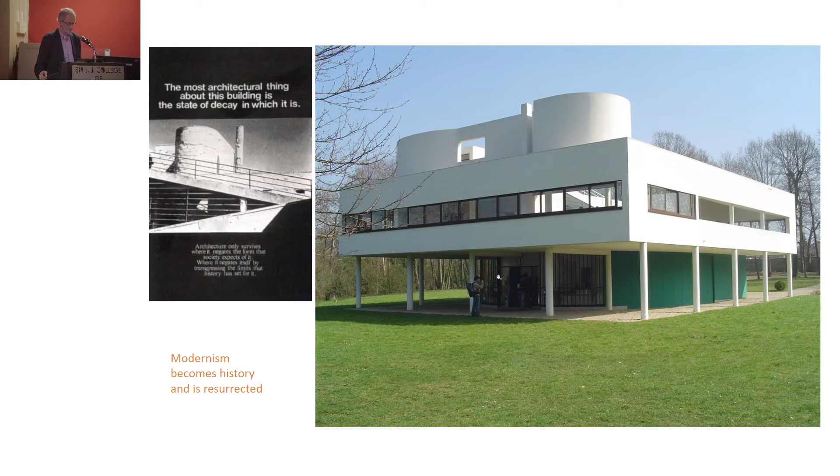Now, shortly thereafter, in the early 1960s, the French Ministry of Culture decided that Le Corbusier's Unité d'Habitation, which at that time was only 12 years old, should be a listed structure. And that thus began the process of actually listing modern architecture. Pay note to the fact that it was only 12 years old, because typically, as you've probably encountered in the charters and standards by which conservation architects and planners work, you usually wait for about a 50-year period to achieve that level of significance, to make sure it's really something that is legitimately going to be historic.

Modern architecture changes all this because of the wear and tear that happens on these buildings, and the fact that many of them simply were not durable. And you had to make the choice early on if you wanted to save it.

So let's make sure we understand basically what we're talking about. We have a kind of common lexicon of what this modernism and modernity is. It's about three broad categories: society, technology, and aesthetics.

And I'm going to show you three examples of buildings that I'm quite familiar with that illustrate these, I think, but also illustrate preservation or conservation lessons at the same time.

First of all, this is the Kiefhoek Housing Estate by J.J.P. Oud in Rotterdam. And of course, housing was one of the key drivers of the early modern movement. Housing and health — it was all about uplifting the condition of the European proletariat. This is really what began, and really the global proletariat, because it very quickly became a larger movement than just in Europe.

This is the kind of housing that was built, circa 1930. But bearing in mind what I just said about durability, these buildings by the 1990s were literally falling apart. They were made of a substandard concrete masonry unit which was crumbling, and they had basically become condemned by the Dutch government as being uninhabitable.

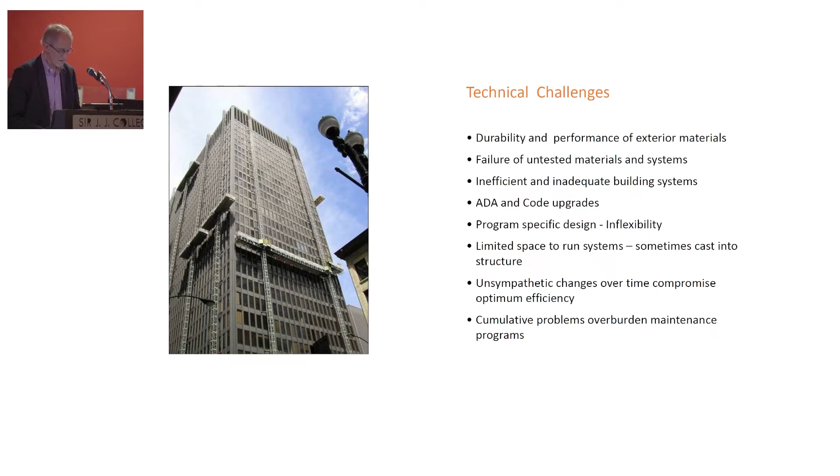I did say global, so I want to start talking about some South Asian and Latin American examples of the kinds of things being addressed now in the renewal of modern heritage.

It's going to be years not only working on the renewal, but accommodating the change and the great influx of people. Years ago, we were already being shown images of these sort of ad hoc developments that happened throughout the city.

And I think the idea is not to clear that out and make it look like it was when Le Corbusier first designed it. The idea is to say, how do we integrate this stuff into the city while leaving the monumental city to the expression that it deserves?

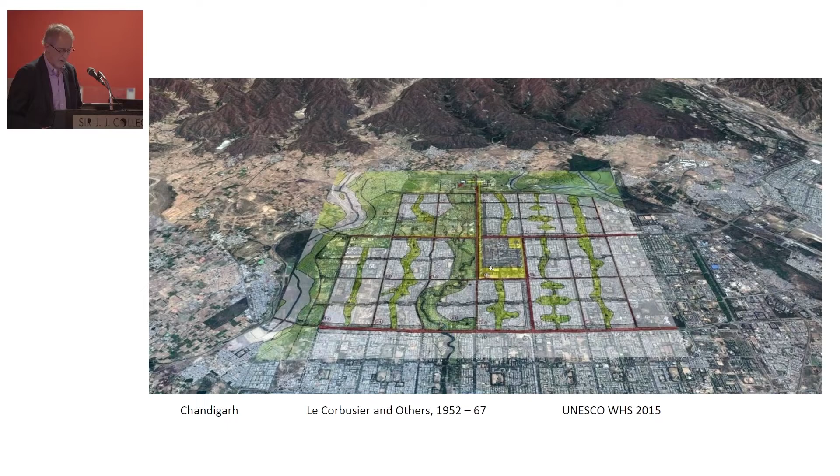George Nakashima, a Japanese architect who eventually repatriated to America, along with Francois Sammer and Chandrulal Shah.

You have, for instance, the Ministry of Education in Rio de Janeiro, the first executed modernist high-rise structure.

Those same louvers are found throughout the administrative buildings in Brasilia, and they keep these buildings well enough shaded and sufficiently habitable that they can be used throughout the year without air conditioning, although most of them are being retrofitted with air conditioning anyway.

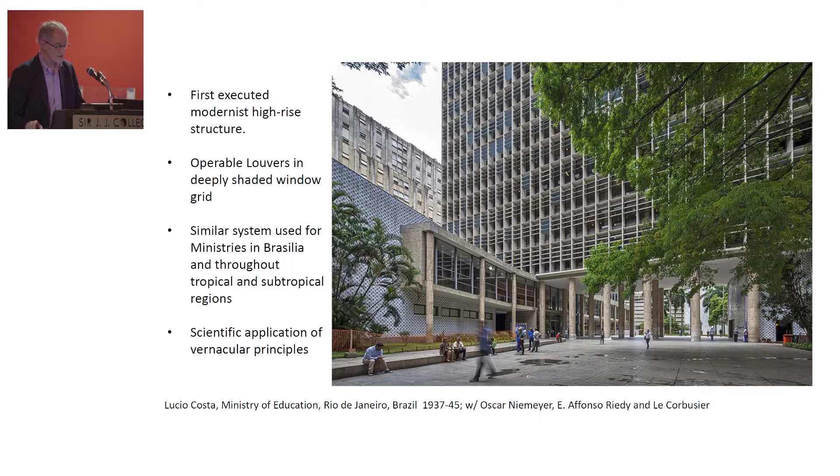There's a lot of serious heritage in Brazil. A World Heritage Site was recently inscribed for the Pampulha Ensemble in Belo Horizonte by Oscar Niemeyer. Niemeyer was a very young architect at this point in 1940, and did an interesting series of about half a dozen buildings around the lake, which has been brought together and given this World Heritage designation.

It's an eclectic ensemble, and I don't know exactly how to put it from a use standpoint, but they include a residence, a yacht club, a casino, and a church. They're all very, very interesting buildings.

On a larger scale, Brasilia, like Chandigarh, was a capital city, although in this case the capital of the whole country of Brazil rather than just a province.

Those buildings I was just mentioning, if you can see my cursor, are the ministry buildings. There are six on each side, and they all use that same system of operable louvers. This is also a World Heritage Site, and World Heritage inscription means you have to play by certain rules in terms of what you do to renovate your buildings, because what they're primarily concerned about is keeping what's important about these sites important and really not changing them. So change has to be extremely carefully managed if you want to stay on that level.

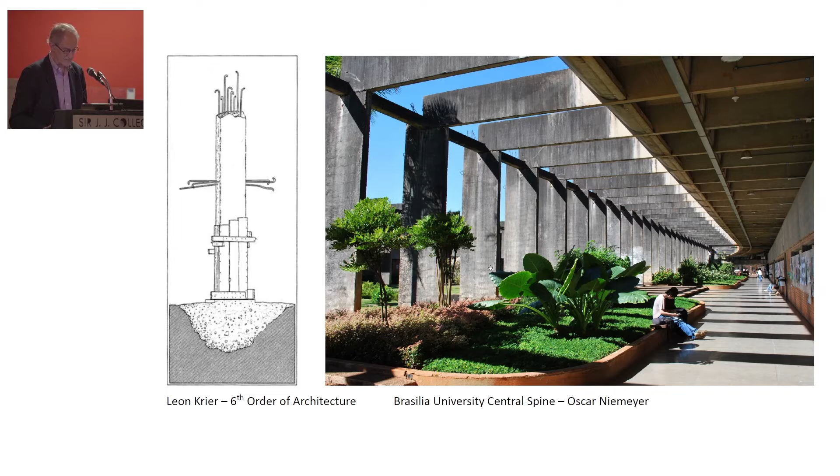I once gave a series of lectures in this building, which is the School of Architecture in Brasilia. It's part of what's called the Minhocao, the Great Worm. What fascinated me about this building was the way these concrete beams kind of end in nowhere — you can see rebar coming out of the top of the column, like Leon Krier's sixth order of architecture there. It's in a semi-ruinous state and is being overgrown with vines and that sort of thing, but it's very poetic.

In a similar way to what Balkrishna Doshi did here at the Indian Institute of Management in Bangalore, although this, in fact, was finished and doesn't have the raw concrete rods sticking up. But there is also this kind of inside-outside quality and a very poetic relationship with nature that I appreciate very much here. Doshi, of course, needs no introduction to you.

He worked with Le Corbusier on this building, the museum at Chandigarh, and he was a collaborator early on there in the 50s before going off on his own in the later 1950s. He, of course, did the School of Architecture in Ahmedabad. This building here, I think we can say, owes something to the museum he had done with Le Corbusier, but very much in his own way and his own hand.

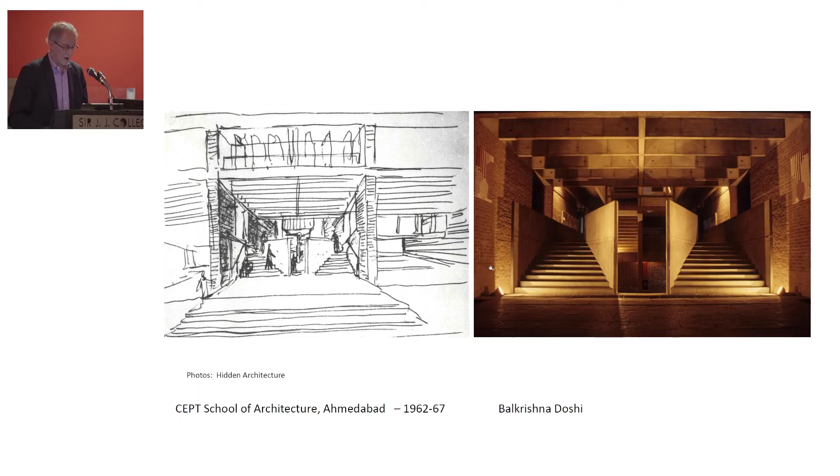These are all buildings that have been recognized in one way or another by organizations that monitor the quality and progress of these buildings. This is, again, from CEPT, a drawing of Doshi's and the actual realized stair there on the right. I also want to mention an early work of Charles Correa, here, the Gandhi Smarak Sangrahalaya in Ahmedabad.

This is a building that I think it's pretty clear Mr. Correa was familiar with Louis Kahn's Trenton Bathhouse, which also is a series of pyramidal roof pavilions. One of the things that's interesting to look at here is that it's a very simple building like Kahn's Bathhouse. Both of them don't have glass windows, they just have openings.

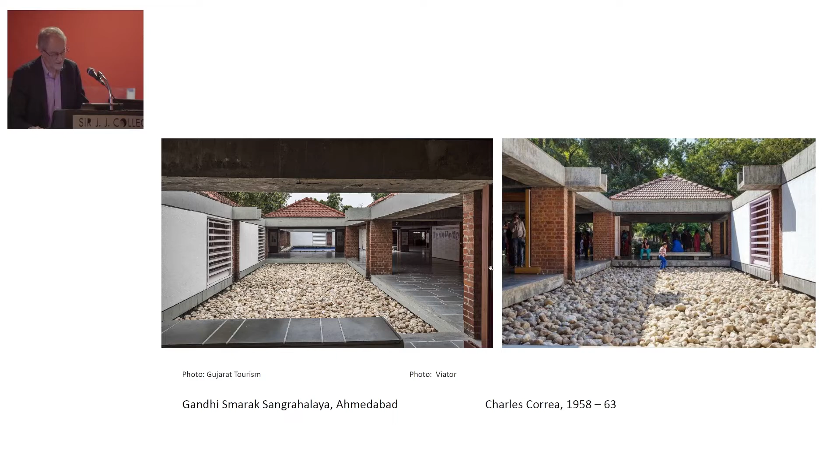If you look carefully, the image on the left, which was taken after the image on the right, you can see that the concrete surround, the supporting concrete for the roofs, is painted, whereas on the right it is still left in its natural state. There's a tremendous difference in concrete — once you paint it, there's a level of depth and variation and kind of life, if you like, to the material that disappears. You may choose to paint it in certain areas as accents, but more often than not, it takes away from the quality of what the concrete can mean for the structure.

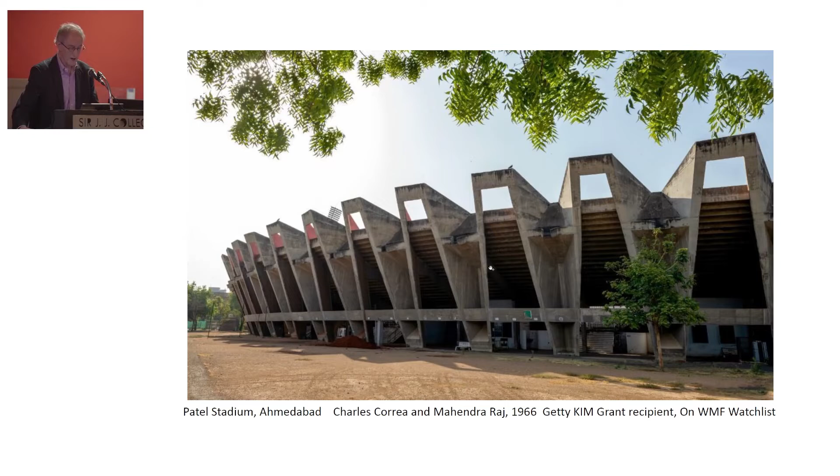So it's something to be cognizant of. Charles Correa's stadium in Ahmedabad is the subject of a Getty Conservation Institute Keeping It Modern grant and is on the World Monuments Fund's watch list.

And it should be, because concrete is the most ubiquitous substance on the planet after water. There is more concrete than there is of anything else on the planet except water. Unfortunately, it's not the most environmentally friendly material to produce, but there's a lot of work being done now to find ways to use less energy and less carbon to make something that is otherwise extremely useful.

Now, I've mentioned a couple of times the Getty Conservation Institute. Since 2012 or 13, when the colloquium was held, they've been developing this Conserving Modern Architecture initiative, which I've been involved in at different times since the beginning—I'm doing some lectures for them now. One of the things they do is give out these Keeping It Modern grants, which the Stadium in Ahmedabad received, and another building, the Gandhi Bhavan by Le Corbusier's cousin Pierre Jeanneret, was also a recipient of a KIM grant.

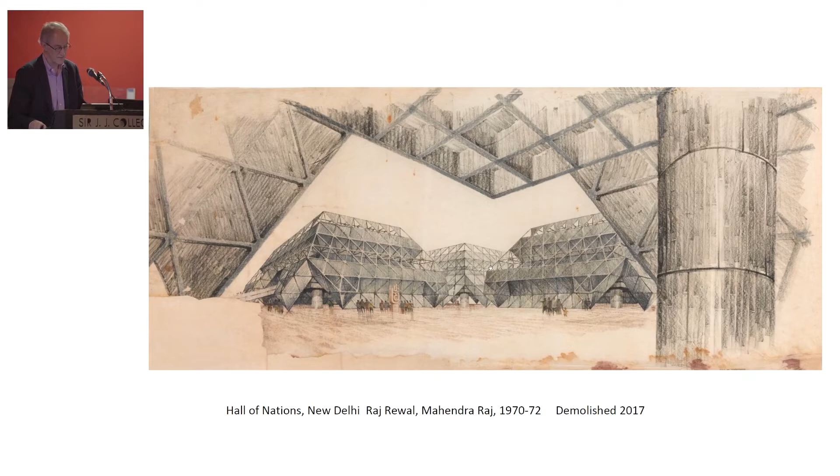This is about change in perception, obsolescence, wanting something new and latest and greatest. I don't really know all the reasons why this was taken down, but in terms of the loss of a unique artifact of modern heritage in South Asia, it's significant. It's sort of too bad.

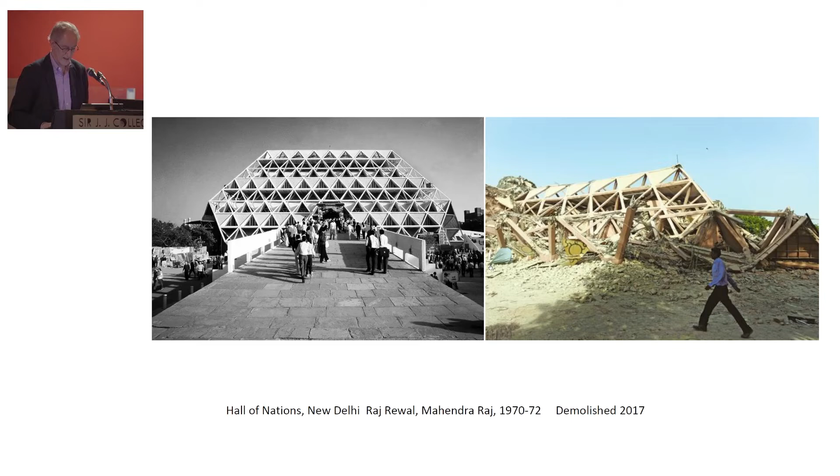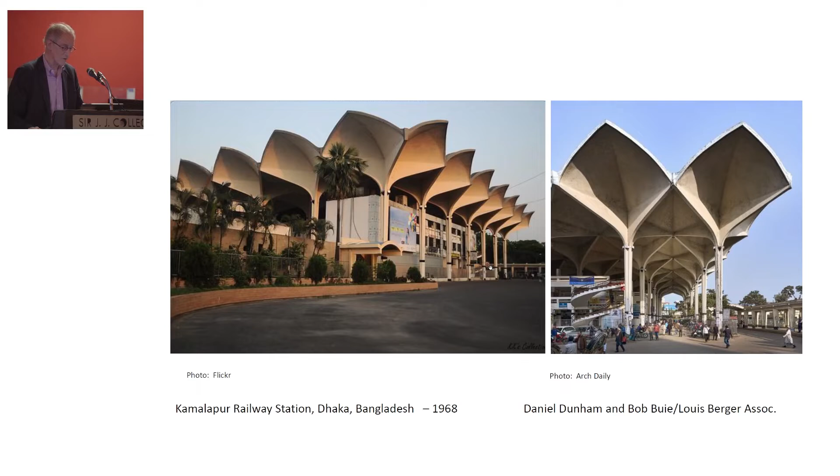Now, a better ending, at least provisionally, exists for this: the Kamalapur railway station in Dhaka, Bangladesh, designed by an American engineering firm named Louis Berger Associates. Daniel Dunham and Bob Buie were the particular engineers who designed these wonderful, blown-up concrete versions of a Muqarnas vault, which is of course a traditional Islamic architectural motif, blown up to a huge, gargantuan scale, making for a very powerful expression and again showcasing the kinds of very innovative things you can do with reinforced concrete.

I'm going to mention very briefly the Indian Institute of Management, because you really can't talk about South Asian architecture today without mentioning it. But I also understand this is an extremely complex issue, that work has been done on the complex over the years, and I'm not passing judgment, let's say that.

So to round out this portion, what we're looking for with all of these buildings is not just what they are and what they represent, but look for opportunities to tell a story about the architecture, about the institute, whatever it is that resonates with the building's users and with the admirers from afar who want to see these buildings preserved. You honor, you interpret, and you interpolate so that you can devise a platform on which to develop this. And then you be bold and informed.

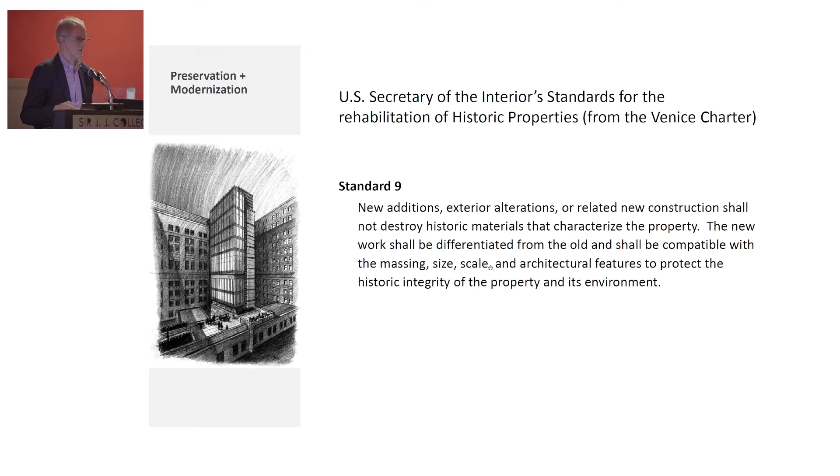When you go to intervene in a modern building, standard preservation or conservation practices require that you differentiate. That's what this Standard 9 is about, from the US Secretary of the Interior Standards, which is basically a United States rewriting of the Venice Charter. It's most of the same kinds of things, but a little broader and more inclusive.

Here's an example of a project I worked on. This is not a modern building, but you can tell what's original and what's new. There are the old wings on the side, the very new piece in the center, and these extended windows punched into the lower level of the side, which are clearly contemporary when you walk up to them, but from a distance blend back. So we tried to strike a balance between these three.

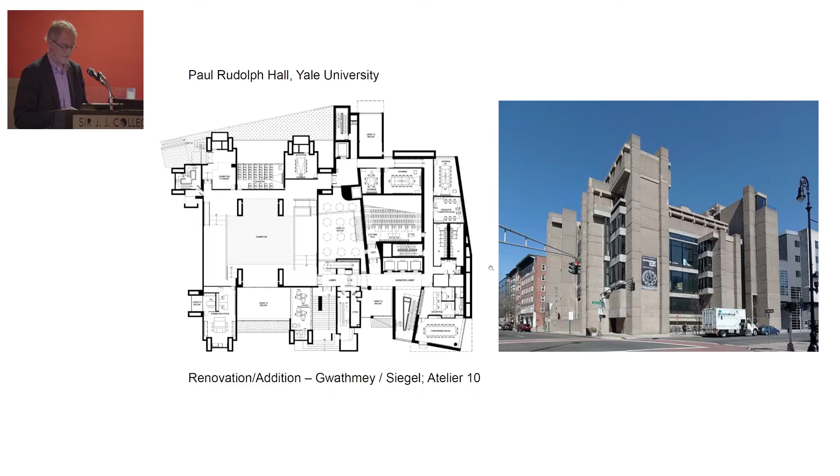In order to bring this building up to code and make it fully functional, because you have all these different levels, you have to connect them with ramps or an elevator, at least in the States. So they built an addition onto the building, which, although it has a few classrooms, its primary goal is to make the older building functional, to make all those connections across, give some relief, and provide things like washrooms. But it's a very difficult thing from the point of view of architectural language.

I think if you look at this, you might agree with me. You can see the original concrete building on the left, and on the right, this slightly tortured addition, which was the product of many great architectural minds, maybe too many. But suffice to say, it works. It holds together.

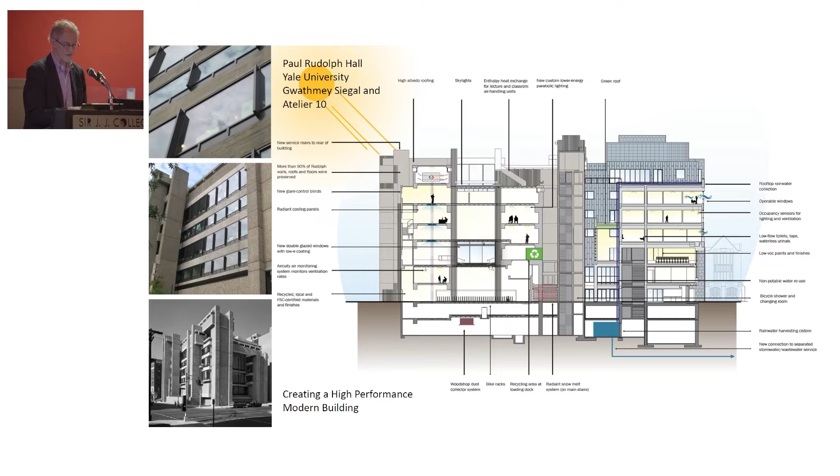What they did here, in addition to restoring Rudolph's work beautifully and solving all the internal problems, was make it a highly sustainable renovation. They worked with a firm called Atelier 10, who work around the world with architects and engineers developing aggressive sustainable solutions for these buildings. Here's an example of how the delivery of air systems goes from fan-driven air to all radiant cooling.

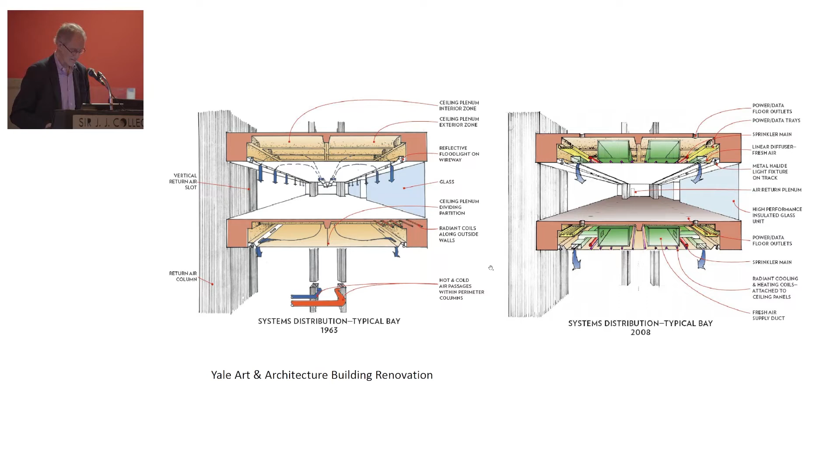In other words, making this building as good an environmental neighbor as it possibly can be. And there's some of the restoration on the interior.

Now we will turn to Louis Kahn and the Richards Laboratory at the University of Pennsylvania. As a reminder, conservation is about the retention and active relationship of these buildings to a community's functioning present. What we were able to do in renovating this building was turn it into the building that Louis Kahn originally wanted it to be.

Initially, Kahn was kept separate from the user group and dealt only with the administration, never really getting the message that scientists don't work like architects. He wanted to build, and I quote, a space that you can devise—no space can satisfy these requirements.

I thought what they should have was a corner for thought, in a word, a studio, instead of slices of space. So he thought it should be open, without partitions, and he created this scheme with big windows designed to promote collaboration and get a lot of light in—things that, as Vincent Scully, a very famous architectural historian, said, make it a town of colleagues, but in a material sense, function not perfectly at all.

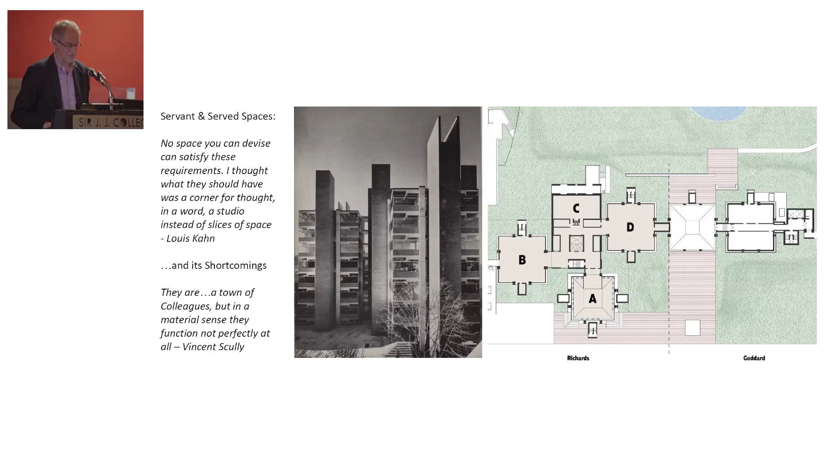At least Kahn, wherever he could, was very systematic in managing the distribution of the systems, stacking and layering the different kinds of services, so that when they needed to work on them, they had access, and everything went back into an orderly place.

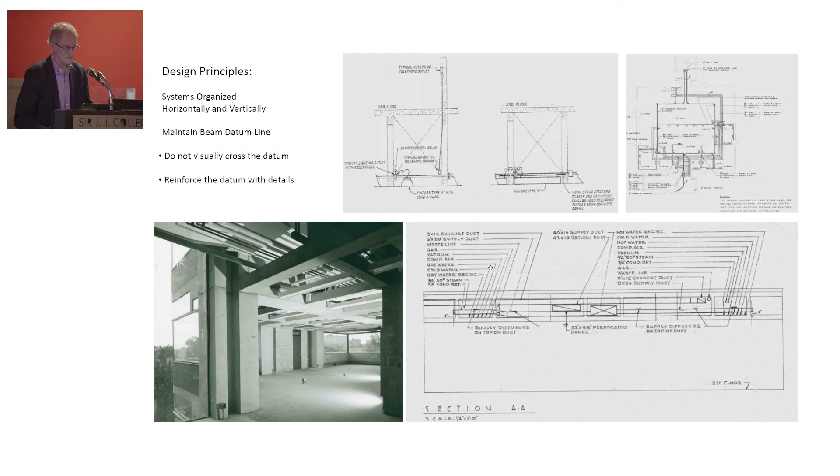So what we had to do was make the building efficient, find a way to create a system of adaptive standardization so they could still make the changes they needed, but in a methodical and disciplined way, encourage a culture of collaboration, and importantly, switch the big functions from wet science to dry science.

In this case, it's a Center for Cognitive Neuroscience, so it's really all about a lot of computation—a lot of computers. There's an MRI machine, but no big fume hoods and wet benches and that sort of thing. And then finally, respect but improve the building.

So these are some of the things we did as we worked through this, including the introduction of high-performance laminated glass—that's a whole story in itself I won't get into tonight. Between that and the change in the mechanical systems, those were the things we did to vastly reduce energy consumption, because we had a mandate from the university, from the Century Bond Project which funded the building, that said you have to be as aggressive as you possibly can.

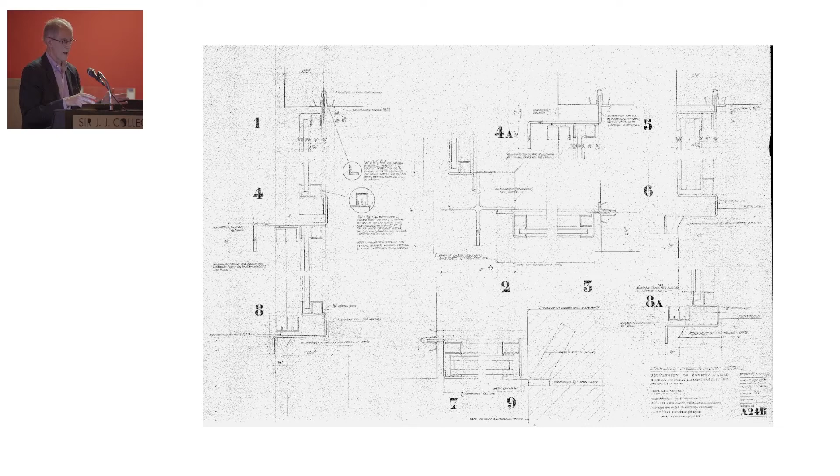But first, before doing that, we had to go back and really understand what Kahn was after. These are the glazing details for the building originally—a series of diagrams of different solutions he tried before Richards, with Richards, and after Richards. Then this is my own idea for trying to use an insulating glass unit, and finally we arrive at the circled center solution with the laminated glass.

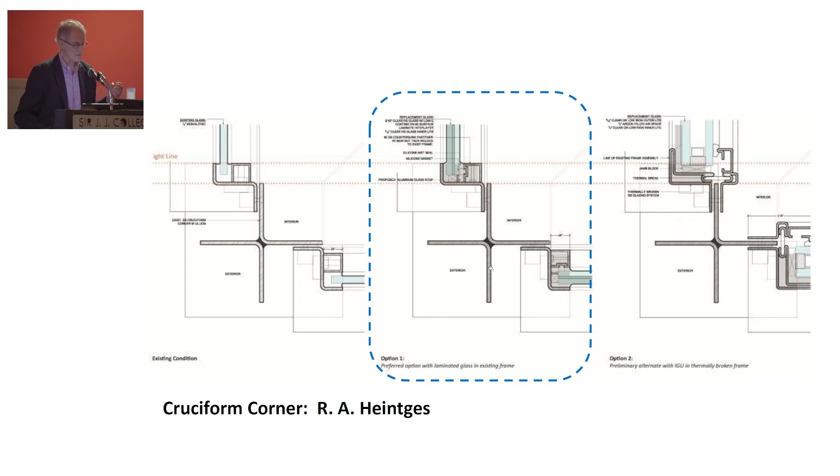So this was a very important and very long sequence we took to get to this. But it proved to people that in order to keep the essence of the framing, which was so important to the look of the building, we had to keep that consistent. That all made its way into design guidelines, so even after this work is done, if they have to go back later, they know exactly what they need to do in terms of working with either the glazing or the systems.

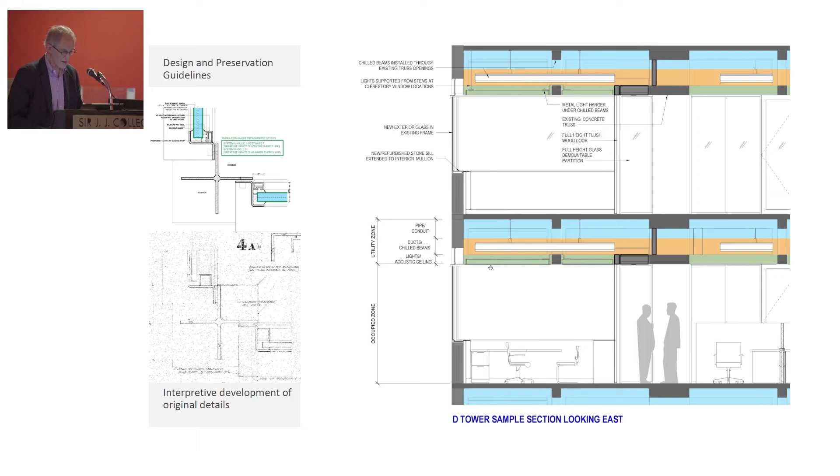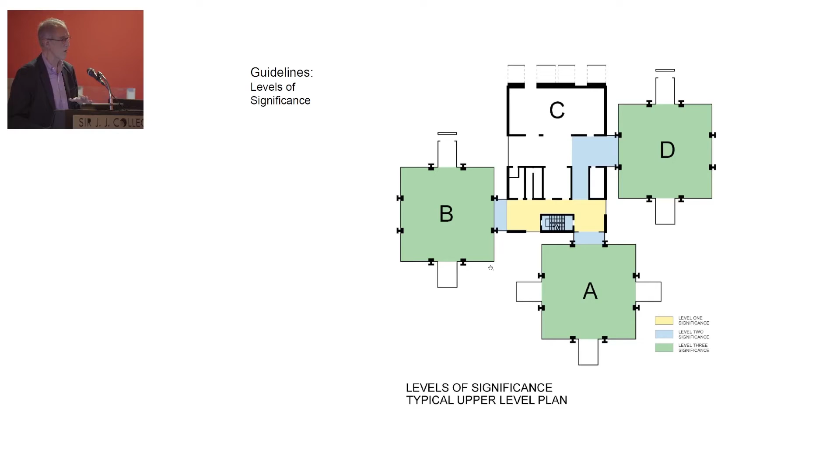I'll go through this quickly. The programmatic changes were primarily in the green areas, which, even though from the outside they are the most expressive and have the lowest degree of significance in the building, from the inside it's really all about making something work.

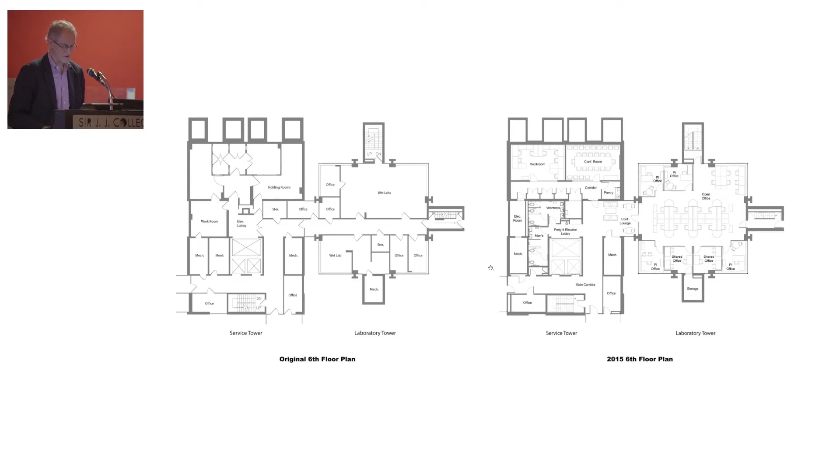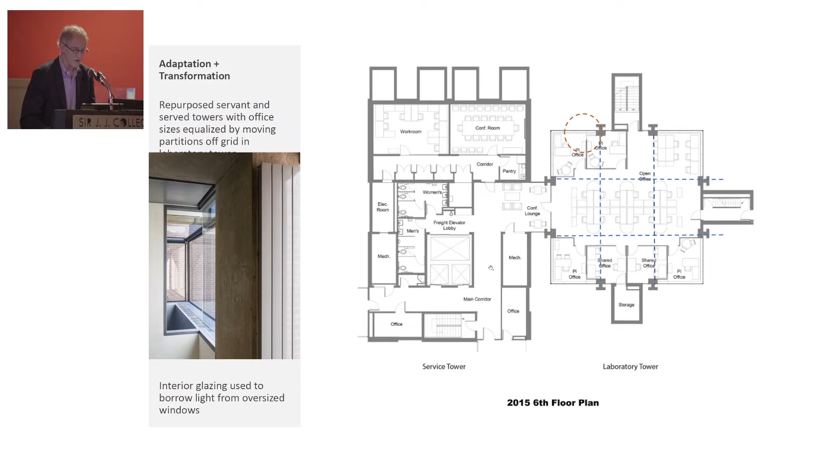So what we have here is the original 6th floor plan on the left, and on the right this plan where you see a space opened up in the center and filled with workstations. That red circle corresponds to the photograph shown. We moved partitions off the original grid that was dictated to take the lines of the structure above, in order to provide the openness that Kahn wanted, equal office sizes, and lots of work areas for graduate students.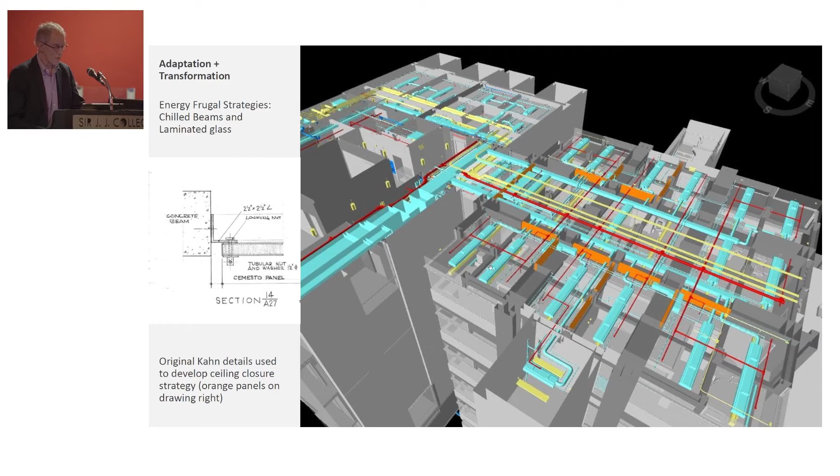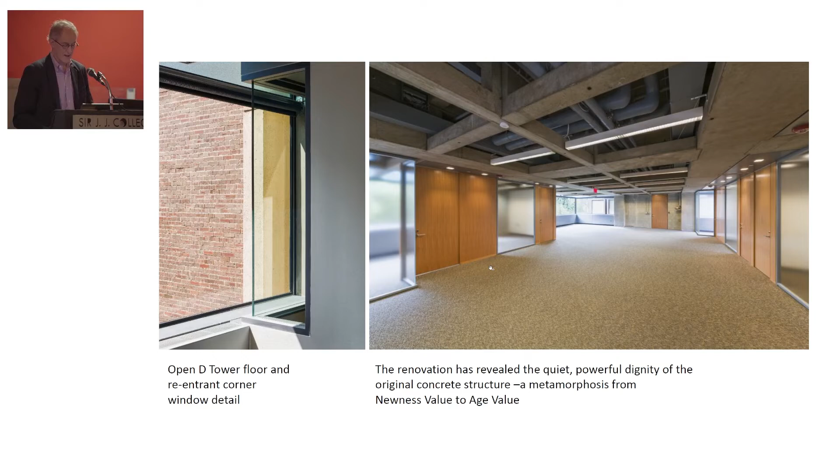We used contemporary modeling, Navisworks for the systems. We looked at Kahn's precedents for things like the material palette and shifting partitions off of a structural grid—these are actual Louis Kahn buildings, the Yale Center for British Art and the Kimbell Art Museum—and created this open space. You can see the rows of lights going down on either side of the areas where we pushed the partitions back, and in the end really made the concrete sing.

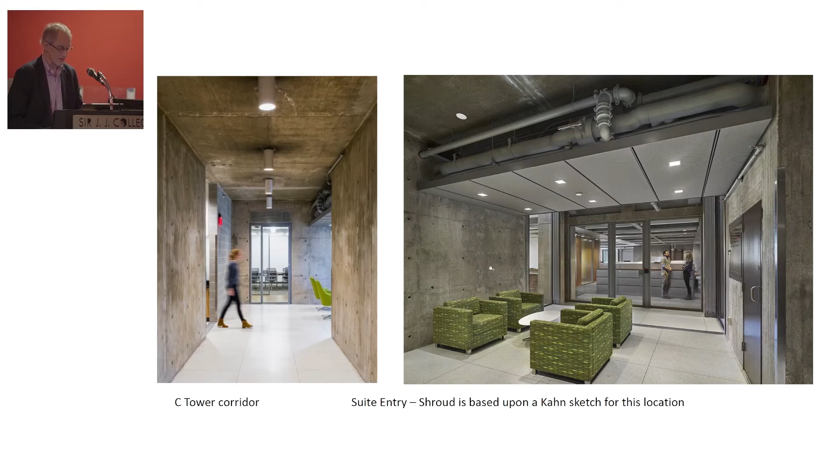We took a soap and water solution and did it twice on the concrete, and that was enough to bring out this beautiful quality, which resonates, and you would never get with painted concrete. You open up views between the buildings that never existed before, so there's a sense of community that's really working there. And finally, the restoration of the entry.

And Mr. Kahn, who I hope would be happy with this work. So the last thing I'm going to talk about is Alvar Aalto's Baker House at MIT.

Again, this is a truncated version of what is normally a much longer presentation. Alvar Aalto—I think I'm missing the slide. Okay, Alvar Aalto was hired by MIT right after the Second World War to design the seniors' housing.

It was the first time MIT had built a residence hall since the original campus was built, and it was really the beginning of MIT creating a culture of student life, which never existed before. It was much more like a German university where everybody just found their own place to live and only came together for courses and labs.

They thought that Aalto had a brand of humanism and care about student life and about how people interact with space, that he would be the appropriate architect for this project.

What I'm showing here is one of the big initial problems we got to, which was that we wanted to restore this building, really, because it worked very well. There was very little that needed to be changed from a programmatic standpoint. The systems were shot, the lighting was not good, there were a few other things like that, but by and large it worked. It was a success.

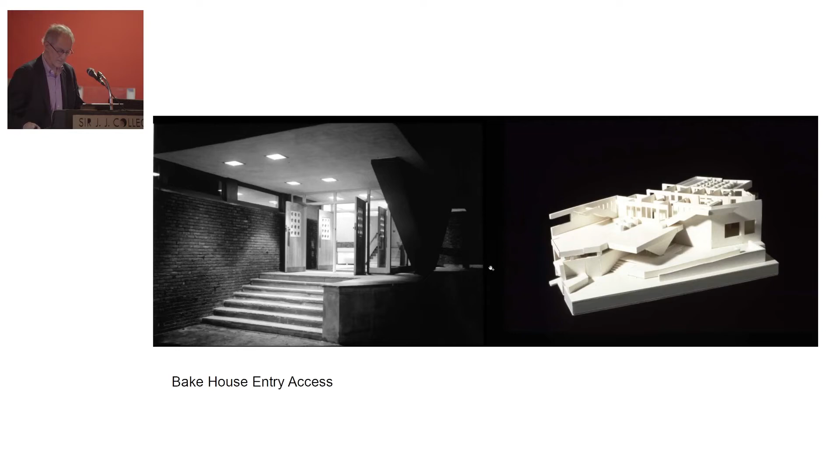You can see the brick wall there on the right-hand side of the slide, and that enables an elevator to come in and move on a skip-stop level, or a half-stop rather. You either go down a half level to get into the dining area, or up a half level to get into the living area.

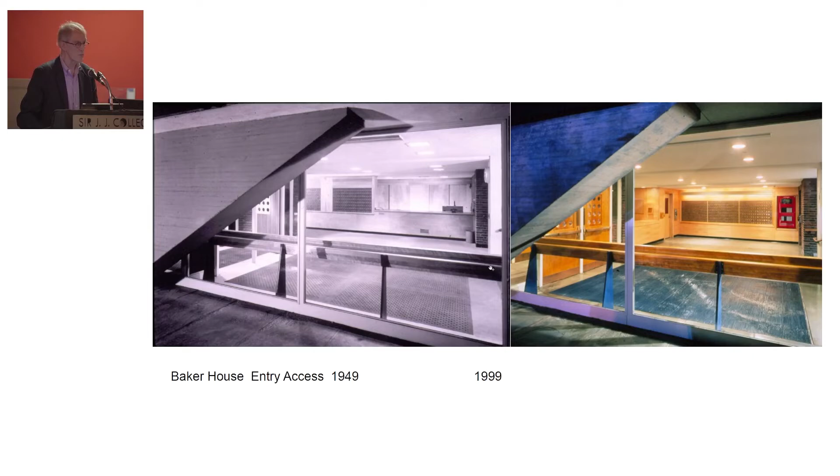So these are the kind of changes we were making here, in a language we realized was not that different from what Aalto used. Here's one of the major spaces, the dining room, which was called by Aalto the jewel in the crown of the building. It's a space nestled into the serpentine shape of the exterior of the building.

What we had to do was predicated by building code issues. So what we looked at first was the wall of the balcony, because it was too low to meet code without risking danger to children. We had to raise it, and the question became how. We discovered in the original working drawings that Aalto had actually planned for a full height wall with no top rail, just a big heavy wall cap, because he wanted privacy between the balcony area at the top and the main dining area below.

We tried a number of mock-ups and came up with a compromise where we conserved the original woodwork on these walls. We dismantled it, raised it to the required height, left a gap, and rebuilt it that way. There's been some controversy about whether we're trying to fool people into thinking that's what Aalto might have done, but the alternative was to add a fence or a piece of glass, and all of those really diminished the space significantly. We felt this was a way to honor what Aalto did originally, make the necessary adjustments, and do it as discreetly as possible.

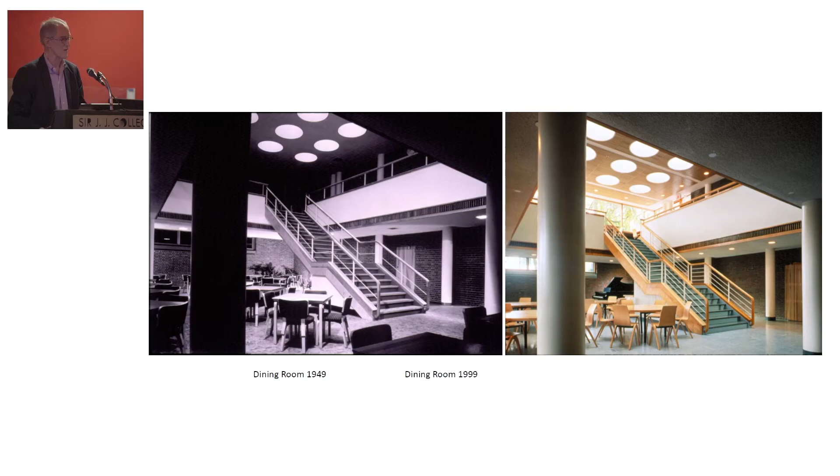And so it did, and we put it in. It looks like a lot of other Aalto buildings that use a similar kind of system, but it's not something original to this building, so you might quibble whether there was a possible alternative. We couldn't find one. We also wanted to activate the roof.

Aalto was very big on habitable roofscapes. On the left is the Paimio Sanatorium, built for tuberculosis patients, where they created a sunlit space at the top of the building for patient use. On the right is a working drawing of the south facade and roof, showing trellises meant to climb the curved wall, and a dotted outline of a concrete slab intended as a roof enclosure, giving the building a horizontal cap and creating a protected roof area.

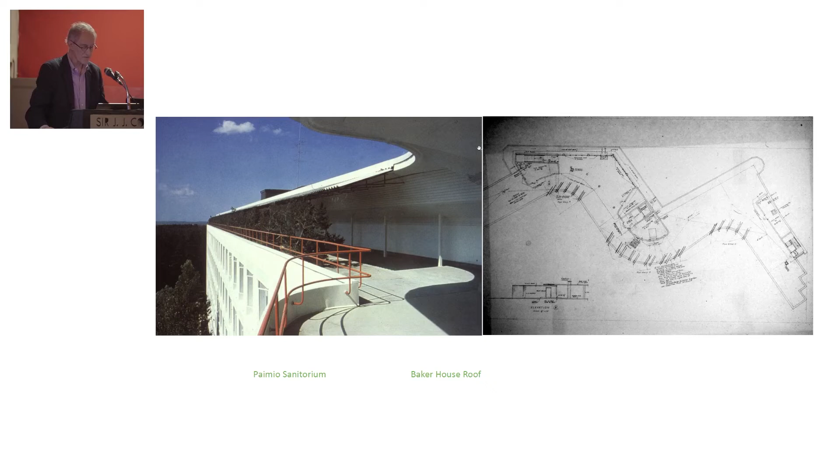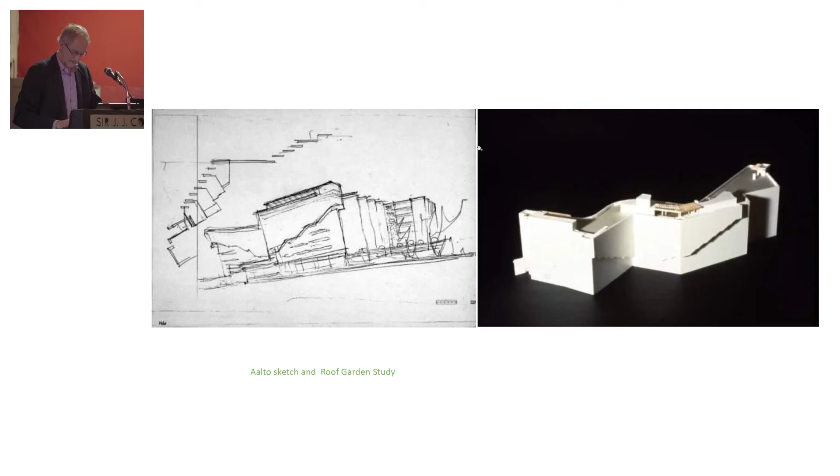Again, we looked at a lot of precedents. This is a sketch by Alvar Aalto showing a trellis on the roof and a new room configuration for when they had to extend the building. We built a lot of models and tested this, looking for what might really make this building sing and reactivate the roof in an intelligent way. Here's another view of that model from another side, and then finally what was built on the roof.

We had to do an addition to the housemaster's suite, which you see here. Again, we tried to make it look contemporary. We used a slightly different material palette, though we did use the same brick where we built brick, to differentiate. The final thing on the exterior is the stucco that you see there on the right.

Restoring that was the subject of great controversy, because we discovered in the course of our research that Aalto originally wanted to tile that facade, but there were actually very good reasons why the tile would fail. The contractor went to MIT, the client, and said, look, we won't guarantee this. So MIT came back and said, you have to change this to something the contractor will guarantee. So they put up the stucco, and it actually was a very good system, and it wore very well, and given the lightweight nature of the way this wall was framed, it actually was a very good solution, because I have seen similar installations where these tiles have popped off. They are actually very hard to control in this kind of climate.

So we merely restored the stucco. We changed the color ever so slightly to make it the color of the terracotta tile that he was originally going to try, but otherwise left it alone.

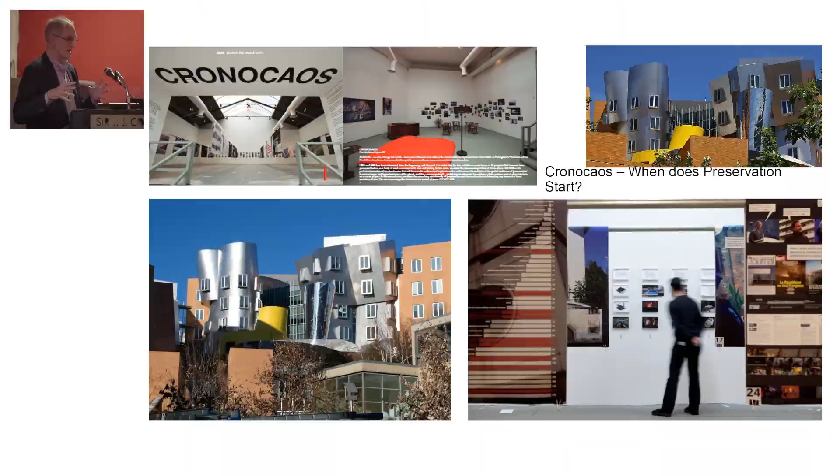That building is undergoing a comprehensive conservation management program right now. The reason is because there are inevitably changes that need to be made to the building. There's a lot of maintenance that needs to be done, and MIT wants this done in a systematic and thoroughly thought through fashion. But the building is only 18 years old. So I think it's safe to say what Koolhaas is predicting is that we're going to be embedding preservation guidelines into our construction documents as we go out to tender for projects when they are first built. And you know, that's actually not such a bad idea.

So I think with that, I will open it up for the panel for questions.